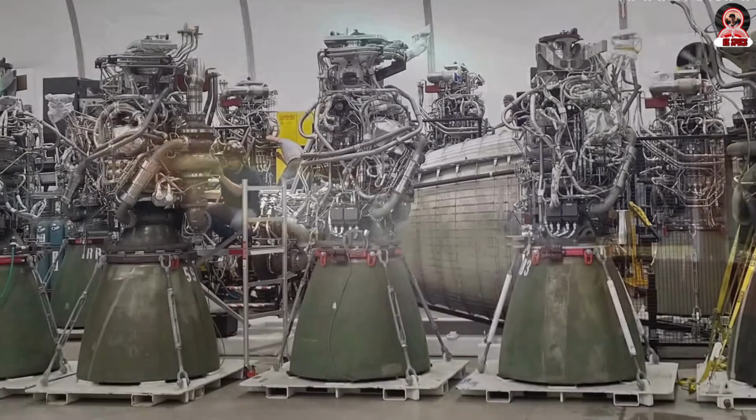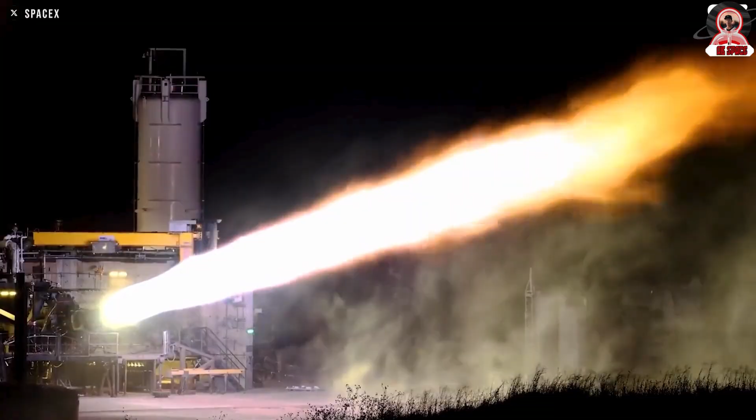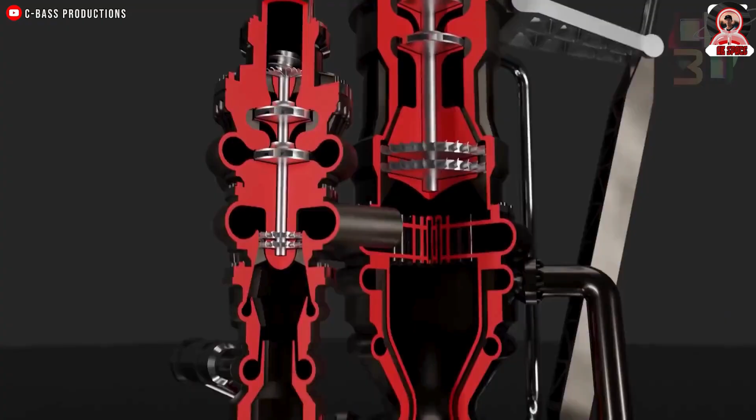During a recent discussion, SpaceX revealed it's implementing solutions to fix issues with the Raptor 2 engines for the Starship version, in preparation for Flight 9. But Elon Musk has announced a new problem with the Raptor. He inadvertently revealed that SpaceX's Raptor 3 engines are currently facing a technical challenge, specifically as they prepare this variant for flight.

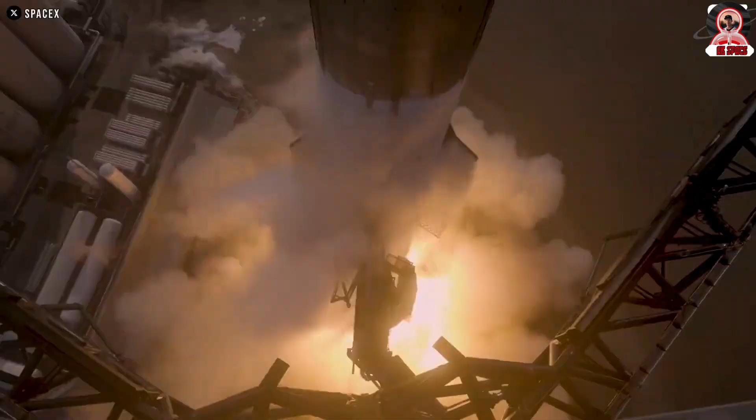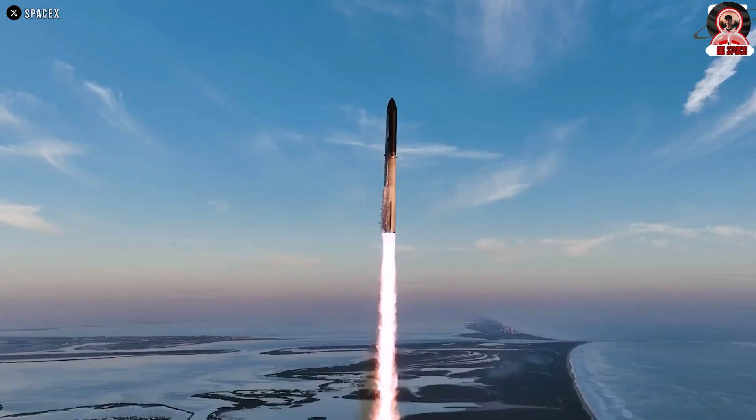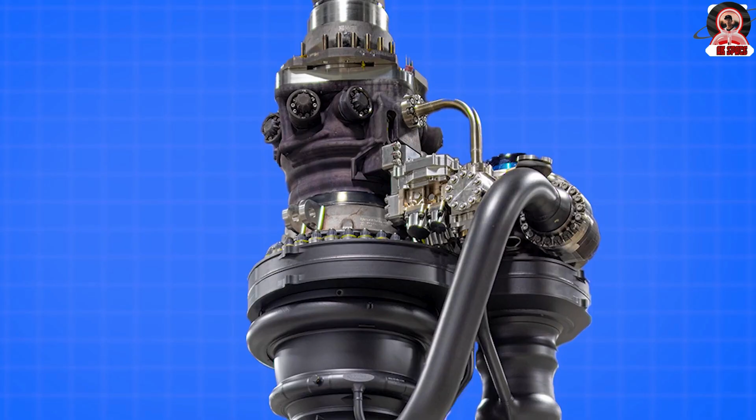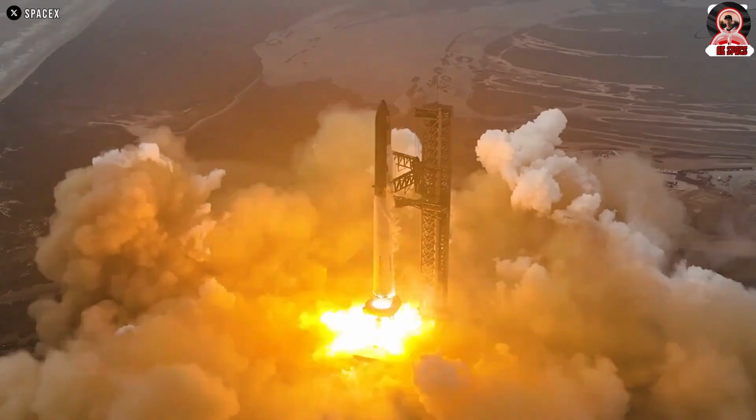Many improvements are still to come. But recently, Elon Musk revealed that even this advanced engine has its flaws, describing some parts as ugly and unreliable. How is that possible for such cutting-edge technology? Although Raptor 3 promises substantial improvements in thrust, efficiency, and manufacturability, current tests have revealed persistent challenges, possibly involving combustion stability, thermal management, or material stresses at the extreme pressures it operates under. Musk's remarks underscore the complexity of advancing engine technology, even for a company accustomed to rapid innovation.

The ugly, unreliable, and heavy bolted flange between the thrust chamber and hot gas manifold will become a welded joint.

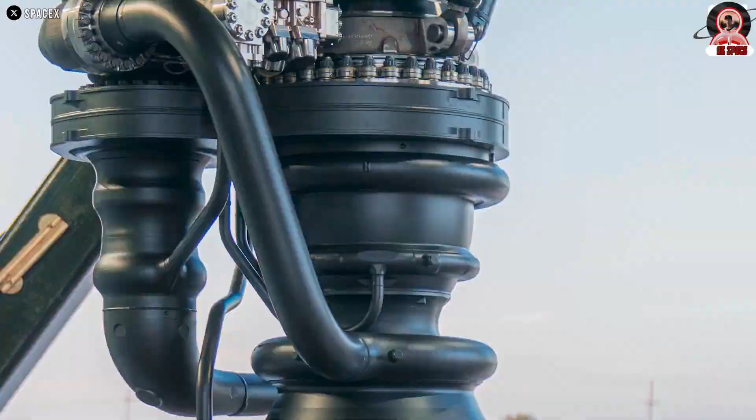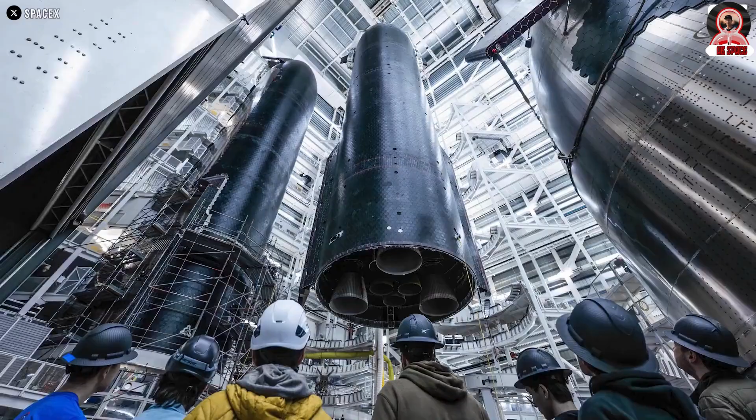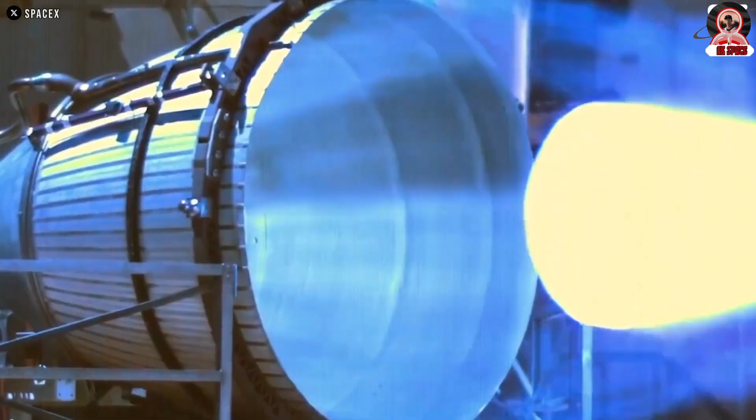As we know, all of Starship's test flights so far have used Raptor 2 engines, so given the timing and content of Musk's comments, it's clear he's referring to Raptor 3, the latest and most advanced evolution of the Raptor engine, engineered to succeed Raptor 2. Like its predecessors, it uses a full-flow staged combustion cycle, one of the most efficient and complex cycles ever developed, named for how it handles propellant flow. But before diving deeper, remember SpaceX has never publicly released any test video for Raptor 3, making predictions about it rather vague. There have been some photos of tests, but whether they were successful, or if there were issues, has never been disclosed.

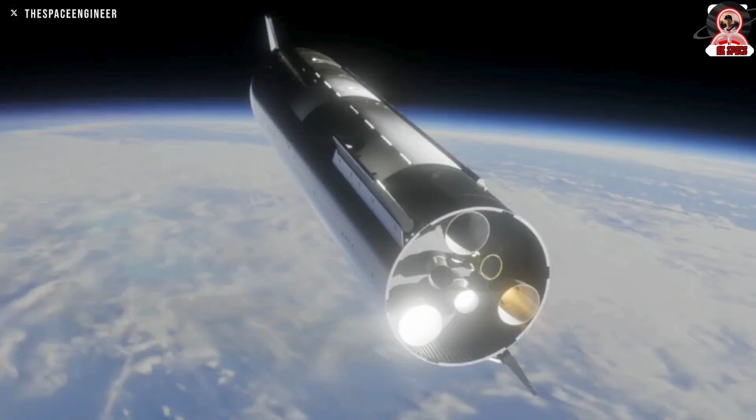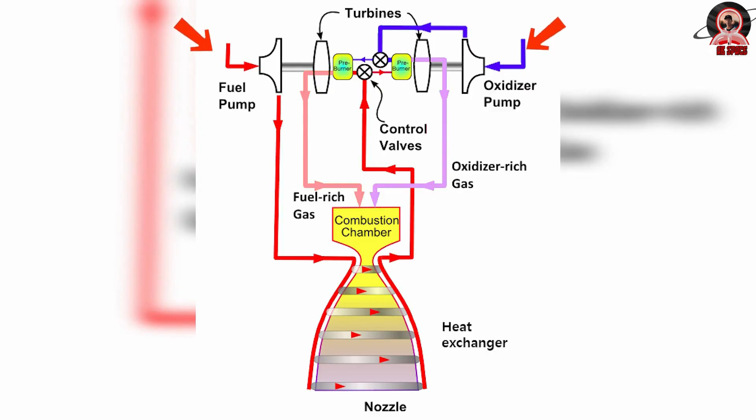This performance was made possible by SpaceX's groundbreaking changes to the Raptor 3 design. And now, with additional comments from Elon Musk, it's becoming more certain that Raptor 3 faces technical challenges requiring significant refinement before operation. While Raptor 3 features a significantly simplified design compared to Raptor 2, Musk's remarks suggest there are still notable limitations. One key area of concern is the connection between the thrust chamber and the hot gas manifold, which currently uses a bolted flange that Musk describes as ugly, unreliable, and heavy.

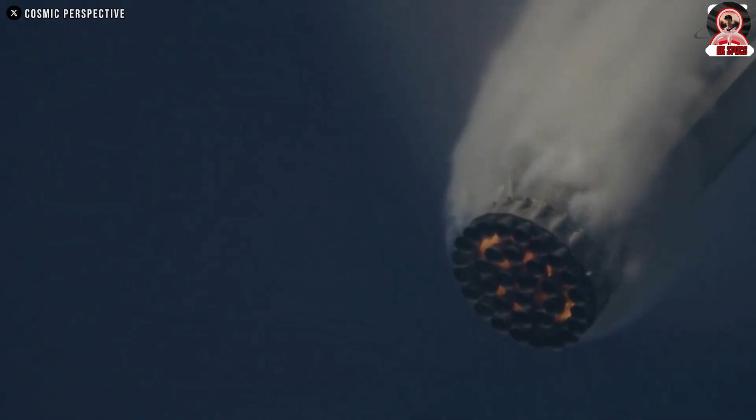In a rocket engine, the thrust chamber is where combustion of propellants occurs, producing high-temperature, high-pressure gases that generate thrust. The hot gas manifold, part of the engine's plumbing system, distributes these gases or propellants to other components, such as injectors or turbines in staged combustion or gas generator cycle engines. The interface between these parts operates under extremely harsh conditions: temperatures over 3,000 degrees Celsius, pressures ranging from dozens to hundreds of atmospheres, and intense vibrations. This joint must be extremely robust, leak-proof, and able to handle thermal expansion mismatches.

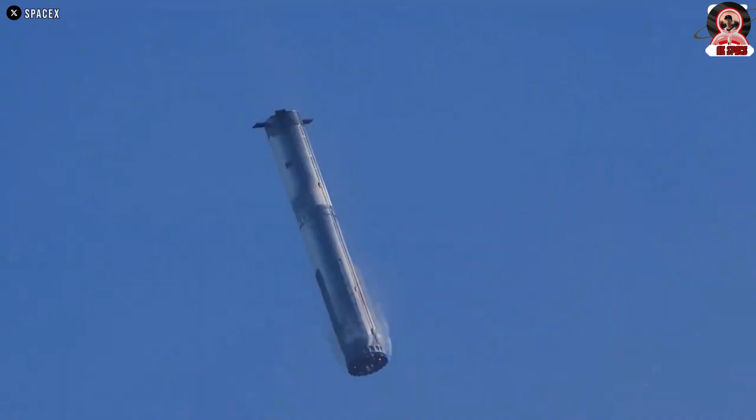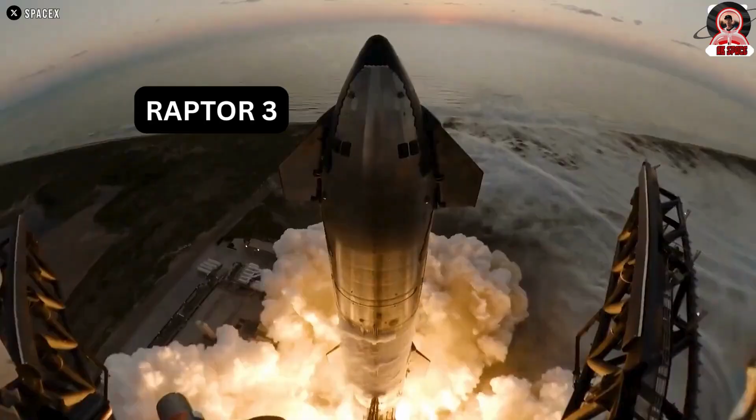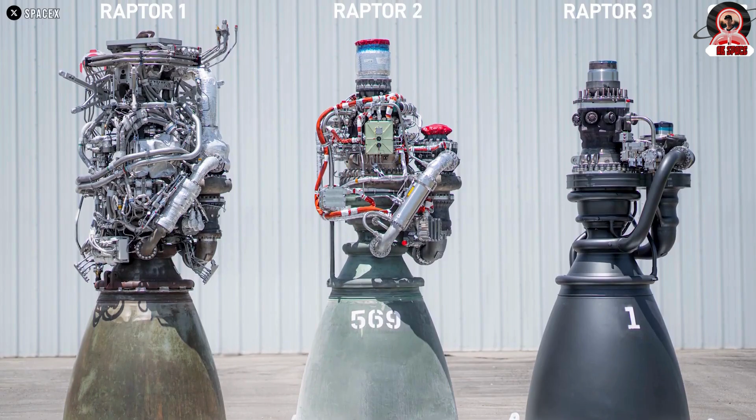Newer Raptor versions, especially Raptor 3, are designed with fewer bolted joints and more reinforced welded joints. Older engines used bolts like screws in furniture, easy to remove and replace. Raptor 3 uses welds instead, like superglue, stronger and lighter but much harder to undo. Great for performance but not ideal if you need to make repairs.

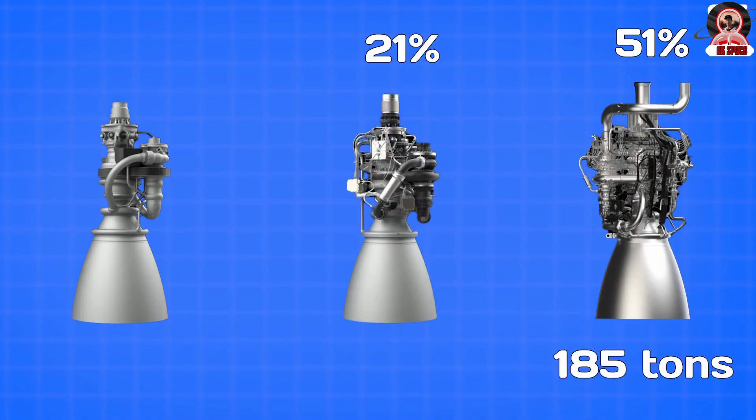A bolted flange is a mechanical connection where two components are fastened together with bolts, often using a gasket to ensure a tight seal. While flanges allow easy disassembly and maintenance, they come with drawbacks that even Elon Musk finds unacceptable. Firstly, the flange adds unnecessary weight to the engine, requiring additional materials for the flange itself, bolts, and sometimes reinforcement structures. In rocket design, every kilogram matters because mass directly affects payload capacity and fuel efficiency.

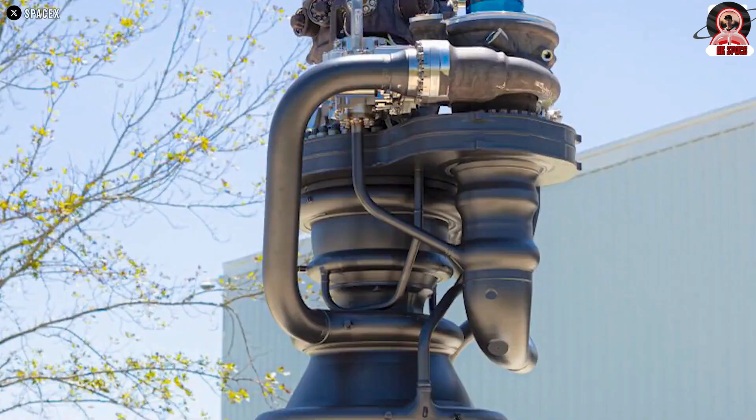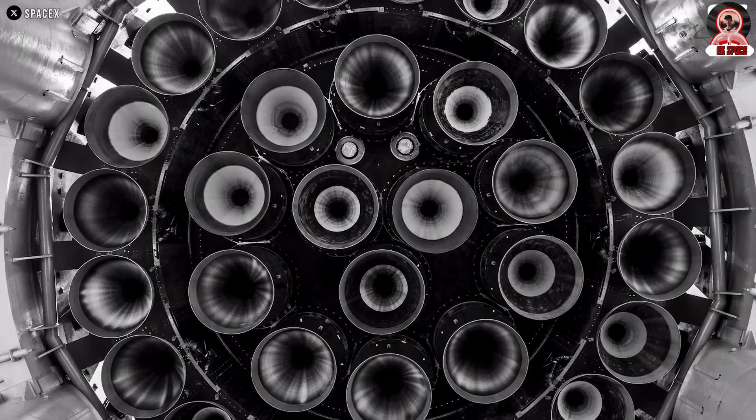Secondly, flange joints are prone to leakage, especially under the cyclical thermal and pressure stress experienced in rocket operations. Gaskets can degrade, bolts can loosen, and misalignment during assembly can damage the seal. Additionally, this type of connection demands precise machining of the mating surfaces, bolt holes, and gaskets, raising manufacturing complexity and cost. Assembly also takes time and introduces risk of human error. Aesthetically, bolted flanges appear clunky and visually unappealing.

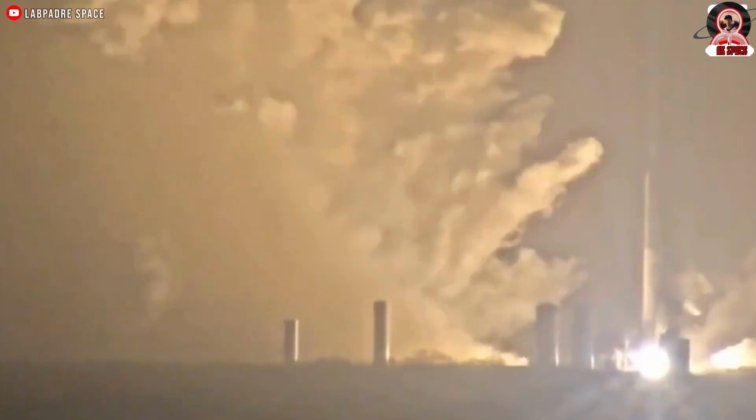To completely address this issue, Elon Musk has decided to replace the bolted flange in Raptor 3 with a welded joint, and rightly so. Welding is a star in the field of rocket manufacturing. A welded joint eliminates excess materials, potentially saving several kilograms depending on the engine's size, and it forms a continuous material bond, making it far less prone to leaks or mechanical failure.

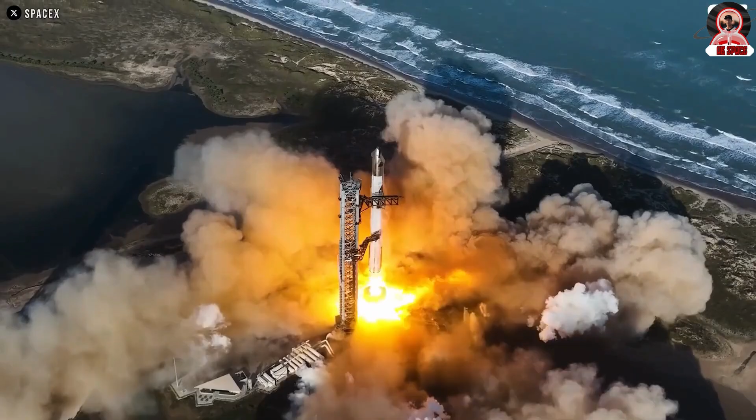Modern welding techniques like laser welding or electron beam welding can produce extremely strong, defect-free joints even in high performance alloys like Inconel or stainless steel, both commonly used in rocket engines.

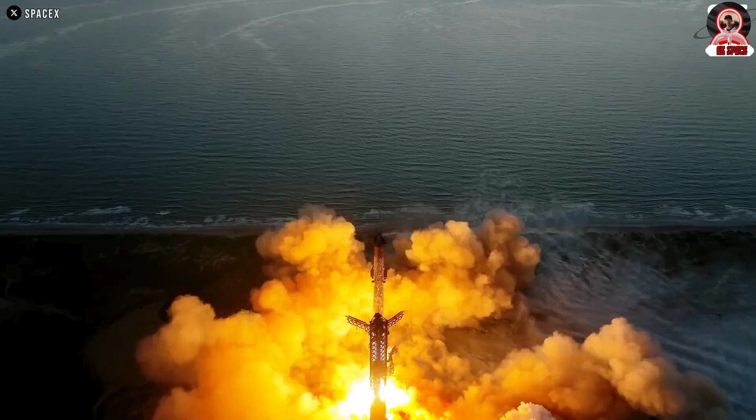Reliability is especially critical for reusable rockets, where engines must withstand multiple firings without maintenance. A welded joint can reduce the need for inspection or repairs at that interface.

Beyond performance, a welded connection offers a cleaner, more integrated look and structure, reducing stress concentrations and improving gas flow dynamics inside the engine. In high-performance systems, smooth transitions between components help minimize turbulence and pressure loss, potentially boosting overall engine efficiency. However, in order to fully transition to welding, SpaceX clearly must also confront technical challenges, even though welding itself is nothing new to the company.

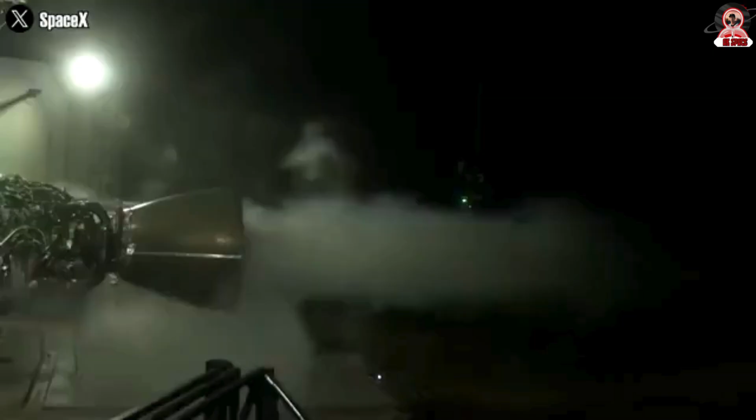While welded joints offer obvious advantages, implementing them is no simple task. Rocket engines operate in extremely harsh environments, and the transition to welding requires careful engineering to ensure success.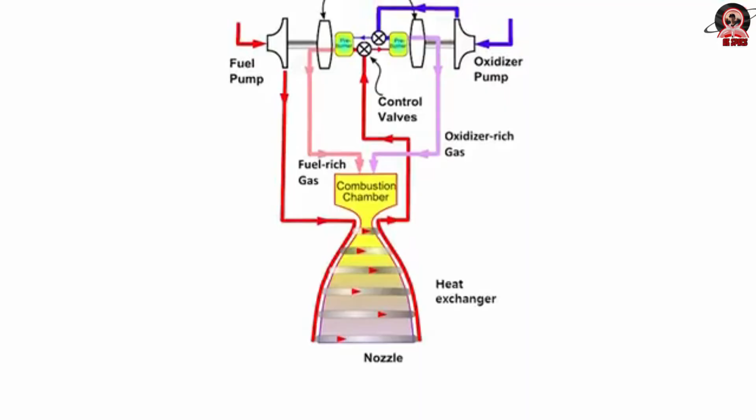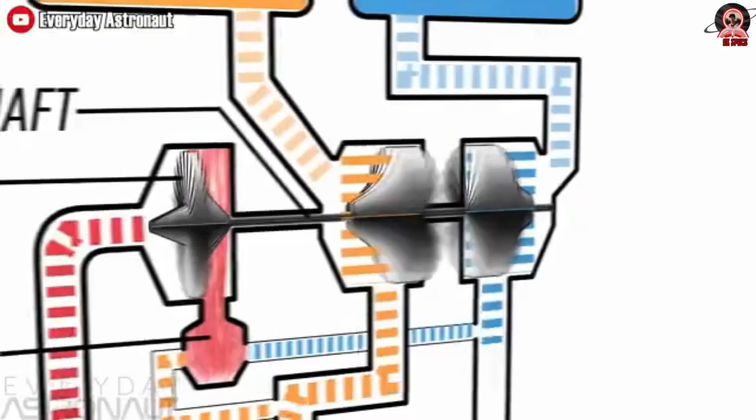The first issue is material compatibility. The thrust chamber and hot gas manifold may be made from different materials or alloys to optimize performance, e.g. copper alloys for the chamber's inner lining due to high thermal conductivity, and stainless steel or Inconel for the manifold. Welding dissimilar metals can be challenging as it risks creating brittle intermetallic compounds or weak joints. Advanced welding techniques such as friction stir welding or laser welding may be necessary to achieve a strong bond.

Another drawback of welding is reduced maintainability. Bolted flanges allow the thrust chamber and manifold to be separated for inspection, repair, or replacement. A welded joint removes this flexibility, making maintenance more difficult.

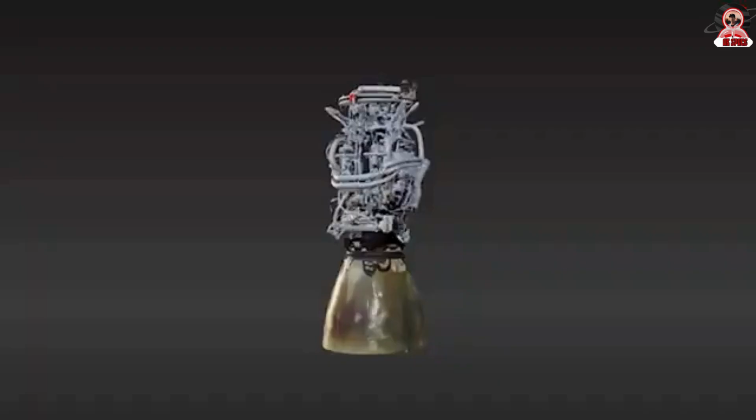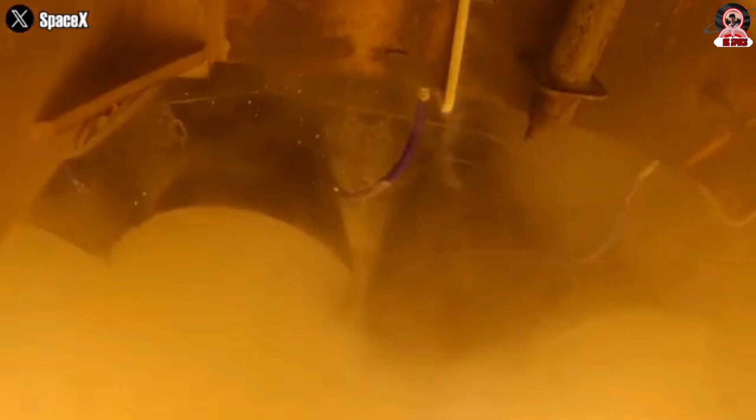However, along with the amazing developments and achievements, there are always technical trade-offs behind the scenes. The integration of cooling circuits into the engine components requires sophisticated design and manufacturing processes. Each part must now serve multiple functions: structural, propulsive, and thermal management, which increases the complexity of both the design and production processes.

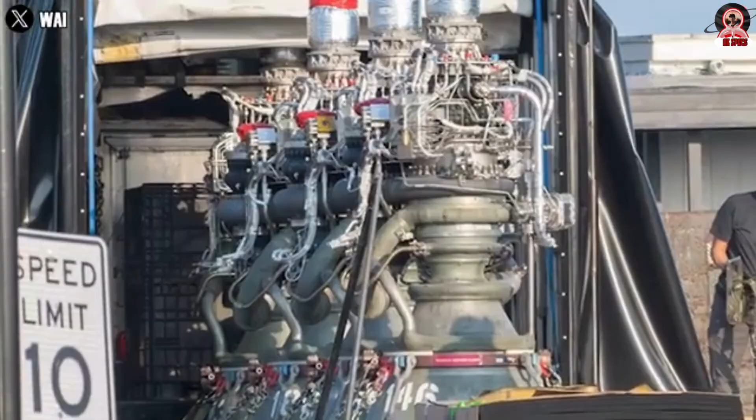This also leads to maintenance and repair challenges. The new design with welded parts instead of flanges makes maintenance and replacement of components more difficult, requiring cutting of welds. This is a trade-off between overall reliability and ease of maintenance.

Achieving ever higher thrust and combustion chamber pressures requires engine hardware that can withstand these extreme conditions. Elon Musk has commented that the Raptor operates close to its physical limits. What SpaceX has accomplished in the past and continues to achieve today is proof of that.

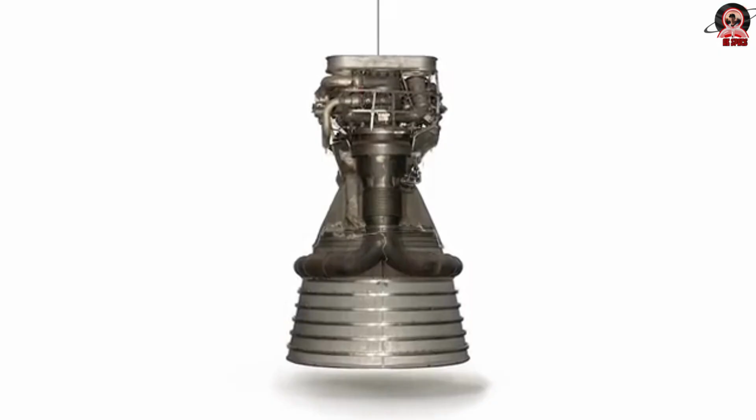SpaceX succeeded with the technology behind this next-generation engine, known as the full-flow staged combustion cycle, which for decades had been considered nearly impossible by traditional aerospace companies. Although both the Soviet Union and the United States conducted extensive research on this technology, no engine using this complex combustion cycle had ever been put into operation.

Yet only 6 years after Elon Musk announced that SpaceX was designing the Raptor engine, they had completed the first flight-ready model. The full-flow staged combustion cycle is often regarded as the holy grail of rocketry, as it promises to extract the maximum amount of energy from its liquid propellants.

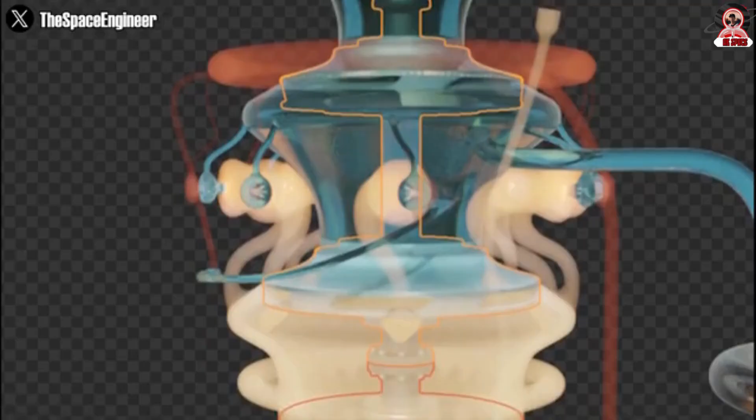In a field where every ounce matters, gaining even a few more percent of thrust is worth pursuing, especially if, like SpaceX, you plan to use these full-flow engines on the largest operational booster and spacecraft in the world.

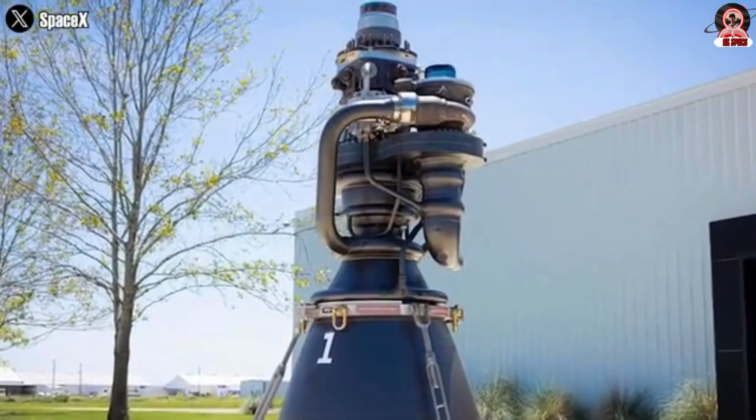Many of the most famous rockets ever flown have used engines based on what's known as the gas generator cycle, including the Saturn V, Soyuz, Delta IV, and even the Falcon 9. In fact, aside from the space shuttle, one could argue that nearly every major milestone in the history of spaceflight has been accomplished with gas generator engines.

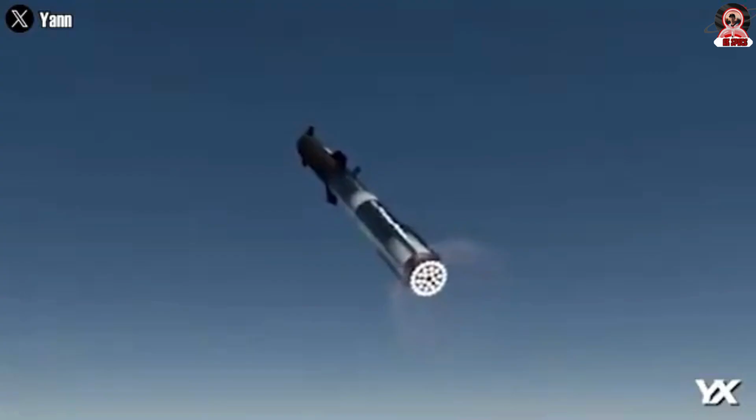This is a technology dating back to the V2 rocket, and one of the key breakthroughs that made liquid-fueled rocketry viable. A gas generator produces gas to spin turbines, which in turn drive the propellant pumps.

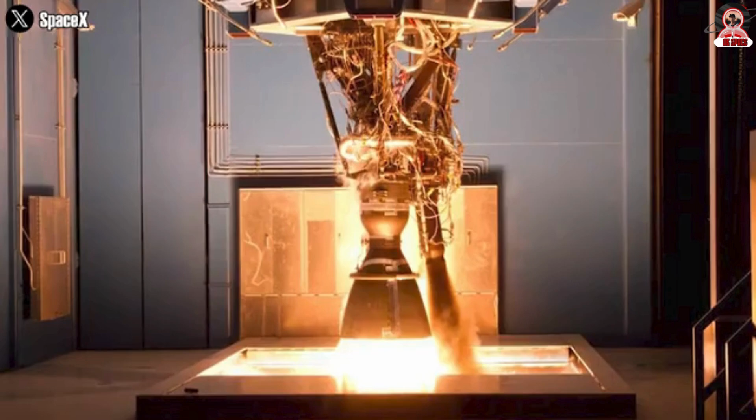In some engines, the gas generator operates independently from the main engine and has its own fuel supply. For example, the V2 rocket's turbines were driven by steam created from a chemical reaction between hydrogen peroxide and warm potassium permanganate. The drawback of this approach is that the secondary fuel system for the gas generator adds weight and complexity, exactly what you want to avoid in a rocket engine.

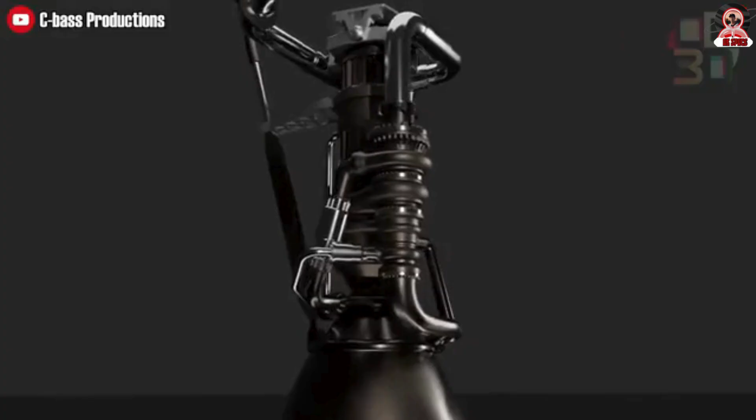A more modern method used in engines like the Falcon 9's Merlin is to power the turbines by burning a relatively small amount of the same propellant and oxidizer used in the main engine. In this case, the gas generator is usually called a pre-burner, but if the pre-burner uses the same fuel and oxidizer mixture as the main engine and at the same ratio, it's essentially just a smaller rocket.

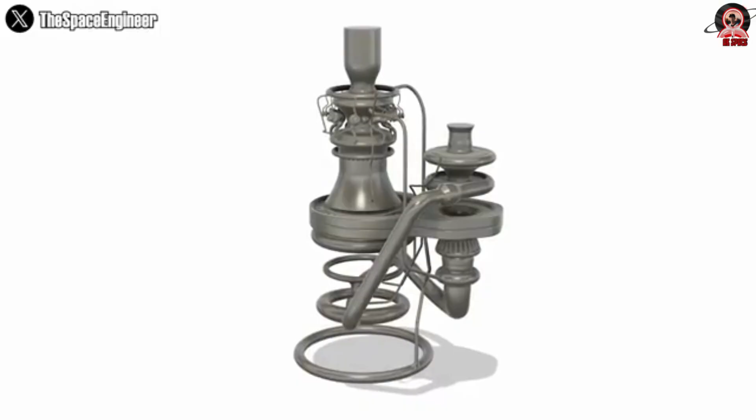Engines are becoming not only more powerful, but also more cost-effective and built to fly many times over. This progress is a clear sign that humanity's drive to explore beyond the boundaries of our planet is stronger than ever, and it's not slowing down anytime soon.